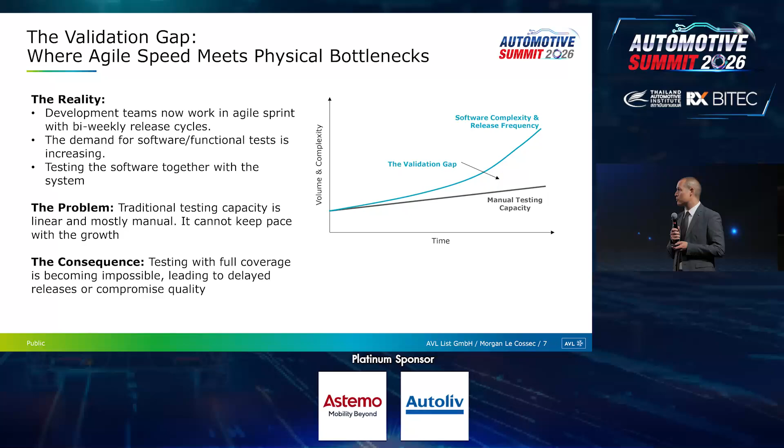And we have complexity in the integration. We have a lot of environments to configure, a lot of assets to manage, a lot of labels, a lot of files, a lot of things to manage. The test coverage and the automation need to be managed as well - it's very complex. The security of the testing also - we talk about cybersecurity, so it's coming more and more into the game, and also resources.

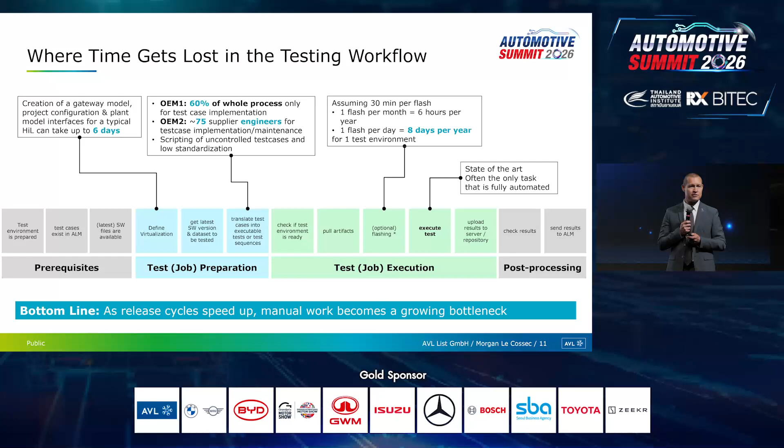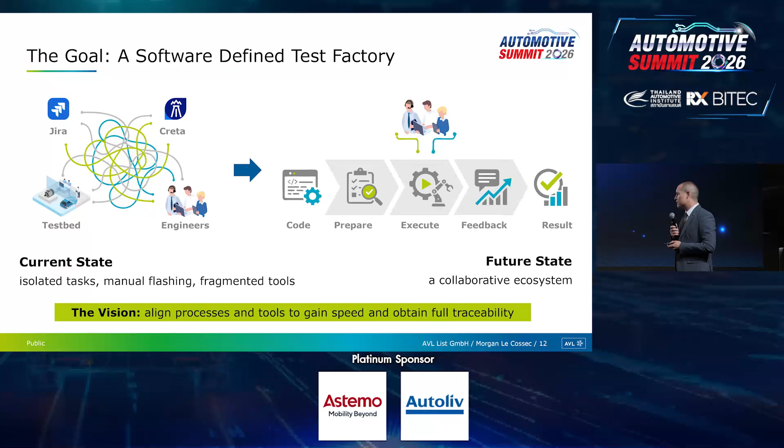What we do at AVL is support the customer to go from this phenomenon to a more collaborative ecosystem, trying to structure and automate all this testing. We want to have this aligned process and tools to gain speed and obtain full traceability behind it.

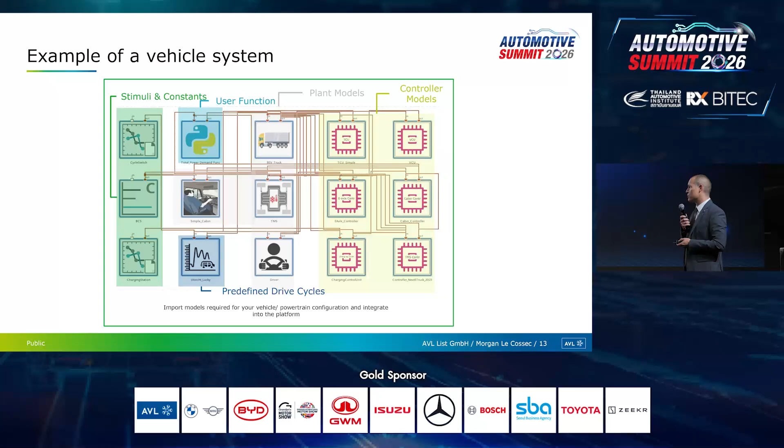And then you need to have some stimuli constants from the environment, and you want to test different predefined cycles. It can be a legislation cycle, or a cycle where you want to test a little bit beyond your system. User functionalities are also available, so there can be many of them.

And when you have this, and you want to really simplify and automate the system, there are different steps. In this presentation we put 5 steps. The first one is a trigger.

To automate, the first thing you have to do is be triggered on demand. The user will start and press play, but before this, it'll give the latest software, so you can see a software change. It will get the latest data set for the different control units, and then start the pipeline. So there will be a new software change, a new update, and then on demand the user will trigger: I want to test now. But that's not all.

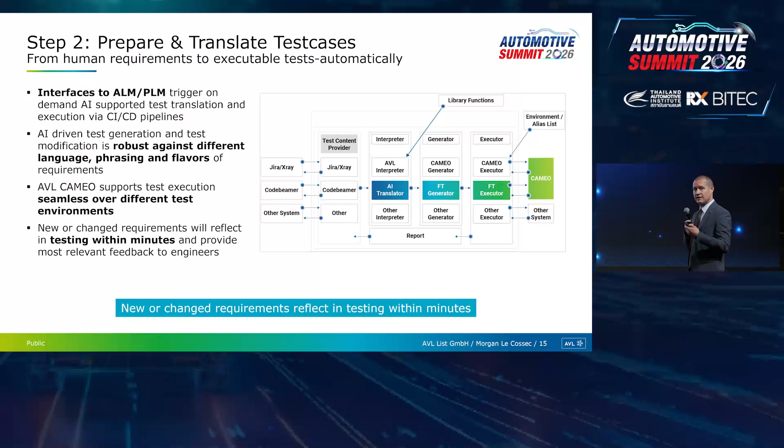It is seamless over any type of environment, and you can test within minutes. In the past, creating a test took at least 2-3 hours, so people were industrializing. Now with AI, you can do it very quickly, so new or changed requirements reflect directly in the testing within minutes. This is what we bring.

And this is very manual, and this is today. In premium OEMs, this is how it is done today. So these numbers don't come from AVL, they come from our customers.

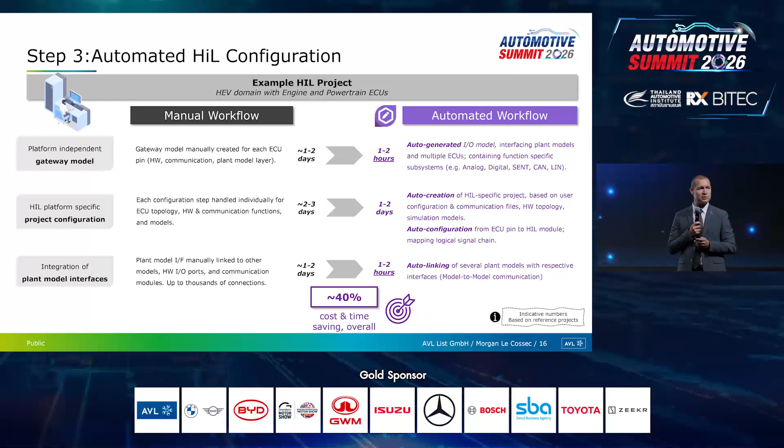Then the next step, step number 4, is we want the engineer to do it automatically. If we talk hardware in the loop, it's something which has a model. We don't want the user to be seated directly at the hardware in the loop—we want the user to be able to use it wherever he is. It can be that the hardware in the loop is sitting in Thailand, and a user from Japan is making it, or vice versa. This is something you can do if you have automatization.

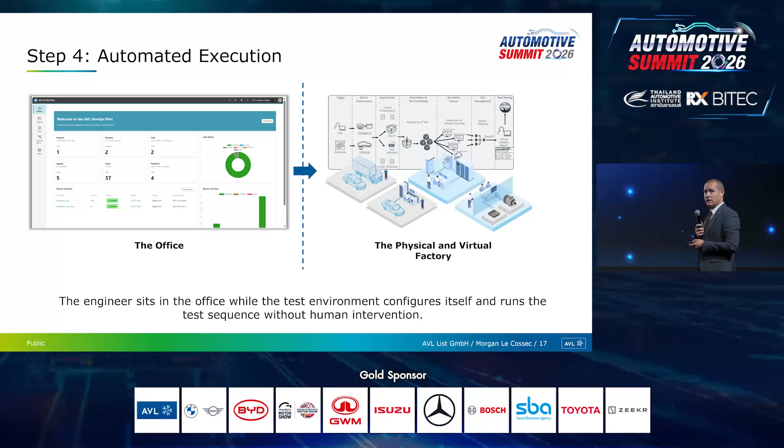So we have a tool which you can parameterize in the office, and it will tell you which hardware in the loop on the planet, from your office or your team, is available for you. Then it will send this to the hardware in the loop and make the test for you. This is also a big tendency for larger OEMs and larger suppliers where there is a lot of hardware in the loop.

And step 5, closing the loop. As we said, no matter where you test, in that case the HIL, what you want is full traceability. So after the test execution, shown on the top in blue, you want to send all the results to the different tools which need to be informed. You want to send it again to the ALM system to say, I have done the test you wanted, and here is the result—it passed or it failed.

You want to send it to the dataset version—this is the new dataset created out of the test, these are the parameters newly generated. And you may want to integrate into a communication platform in your company, for example Microsoft Teams, to send to the different users of the team: hey, this test was passed, this test is available there, and if you click, you can see the result directly. So you want automatization, but you also want full traceability.

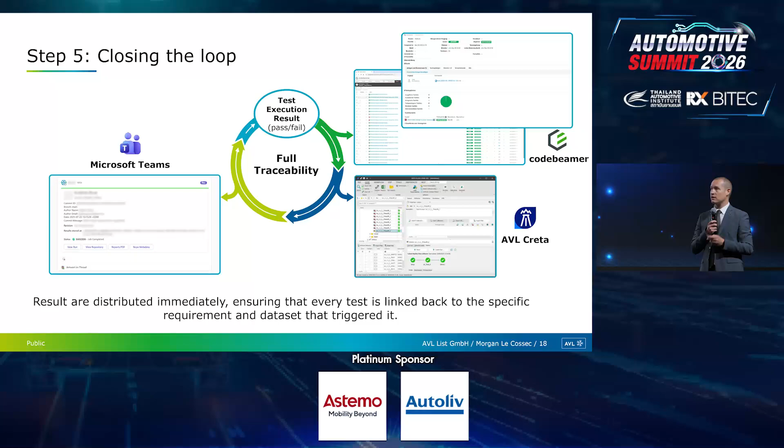No data are lost, you can always find it back, which is very important. Imagine a car has been driving for 5 years, and then there's a new cybersecurity attack. You have to update the dataset, you have to make an update. How do you find back which project was on this car? You need to find where the data are, and you need to be able to rerun the project on hardware in the loop or software in the loop. This is also very important for the life cycle of the vehicle with the new regulation in place, as we've heard today. I'd like to emphasize, because this is new in our portfolio, the hardware in the loop.

So to support the customer, after 20 years of expertise in the hardware in the loop market with a lot of applications, we have decided to launch a new product: our own hardware in the loop, called AVL Nexus HIL, where we have all the different capabilities to do hardware in the loop with all the different formats and state-of-the-art hardware in the loop technologies.

This has been released this year, with very flexible I/Os, multi-domain support. AVL has a lot of expertise in standard ICE, but also in e-drive, battery, ADAS, e-integration, and so on, so this system supports all of that. We have an open vendor-agnostic approach, which means it's very easy to integrate into an already existing hardware in the loop portfolio, or to integrate into a CI/CD pipeline, because we have this automation framework. It's a very cost-efficient and future-ready solution.

With this system, we can bring the HIL as a virtual platform that you can access from anywhere in your company. It's also designed for all these various applications, as I mentioned before. It's integrated in this CI/CD framework, the software-defined vehicle framework. It's a proven methodology with modeling - AVL is very well known for modeling as well.

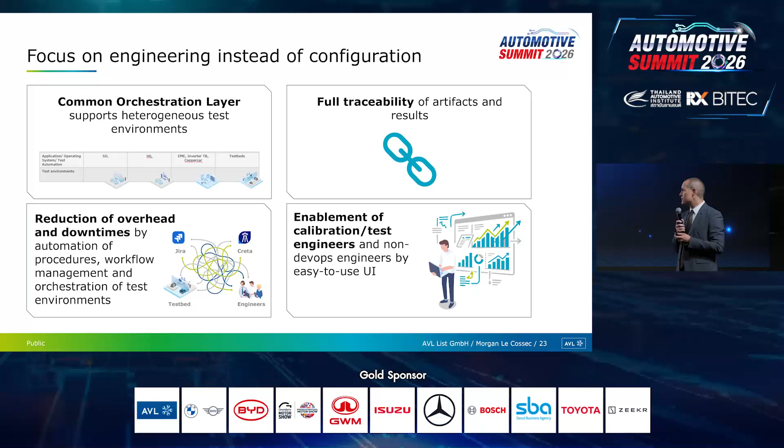And we've seen from the presentation before as well, to develop all this system, you need to have this. With all of this, we enable the calibration and test engineers to work efficiently in an easy-to-use way, with a lot of user interfaces which are very simplified. Thank you very much, and I forgot to thank TAI for giving me the opportunity to talk today.